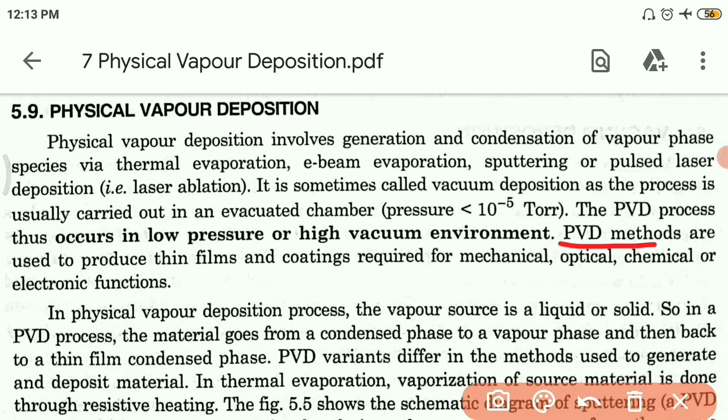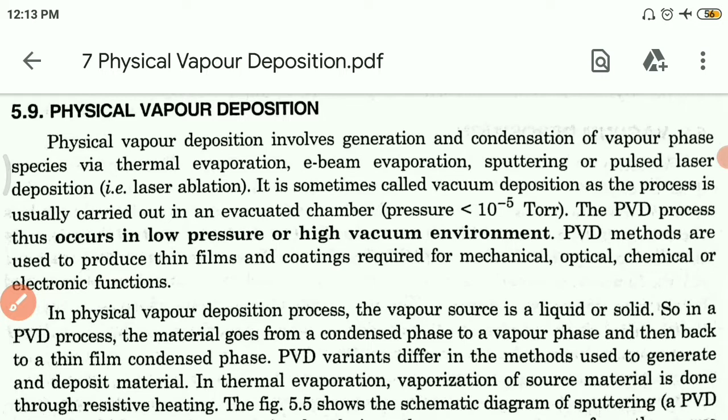In this physical vapor deposition, that is PVD process, it occurs in a low pressure or high vacuum environment. This PVD method is used to produce thin films and coatings which are required for mechanical, optical, chemical or electronic functions. In this PVD process the vapor source is either a liquid or a solid. So in a PVD process the material goes from a condensed phase to a vapor phase and then back to a thin film condensed phase.

PVD variants differ in the methods which are used to generate and deposit the material. In thermal evaporation, vaporization of source material is done through resistive heating. Now let us see the schematic diagram of sputtering, a plasma assisted technique that creates a vapor from the source target by bombarding it with accelerated gaseous ions. Typically we take here an inert gas, Ar+.

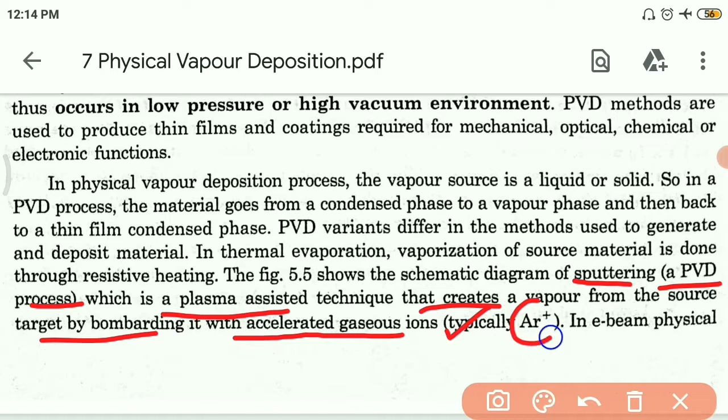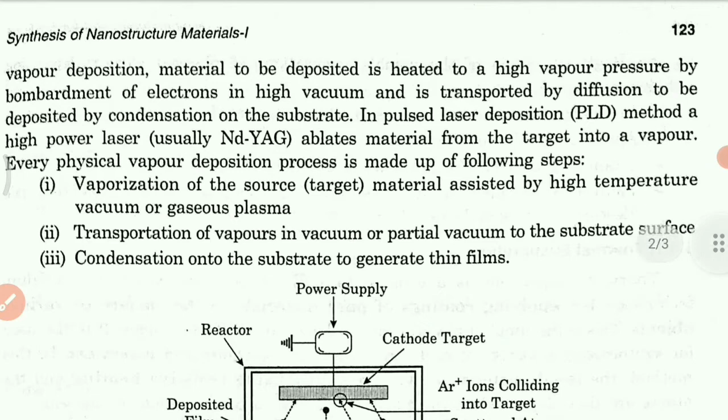In e-beam physical vapor deposition the material to be deposited is heated to a high vapor pressure by bombardment of electrons in high vacuum and is then transported by diffusion, to be deposited by condensation on the substrate.

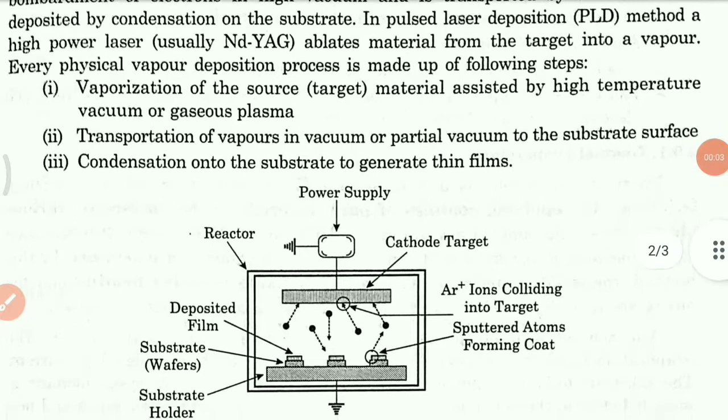So this is the schematic diagram of the PVD process involving sputtering. At the bottom we have the substrate holder. Above this we have the substrate, taken in the form of wafers. Above the substrate we have the deposited thin film. These small dots are the Ar+ ions which are colliding with the cathode target. We have the sputtered atoms forming a coating, so that thin film has been created and deposited above the substrate.

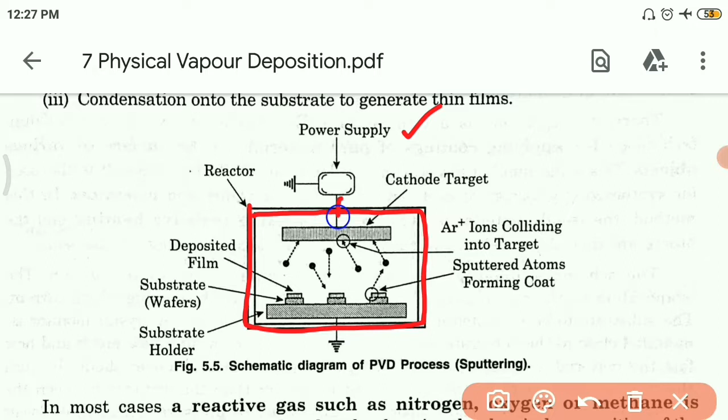This rectangular portion is the reactor, which is the evacuated vacuum chamber, and finally we have the power supply, which is connected with this cathode target.

In pulsed laser deposition, that is the PLD method, a high power laser, usually Nd:YAG, ablates the material from the target into a vapor. Every physical vapor deposition process is made up of the following steps: number 1, vaporization of the source, that is the target material, assisted by high temperature vacuum or gaseous plasma. Number 2, transportation of vapors in vacuum or partial vacuum to the substrate surface. And number 3, condensation onto the substrate to generate thin films.

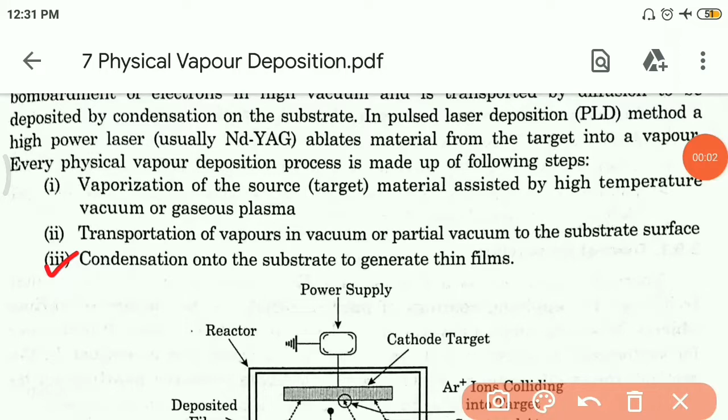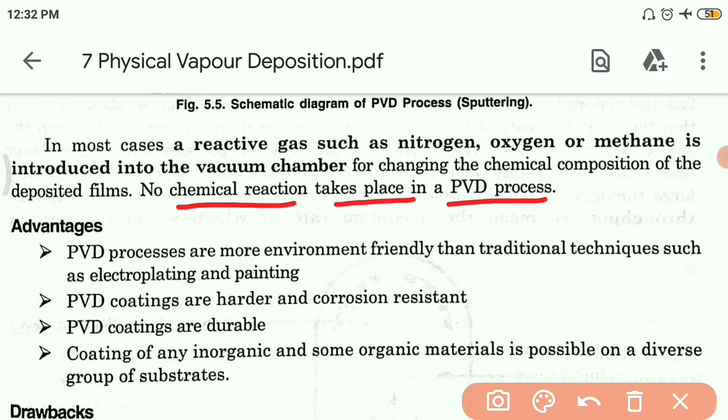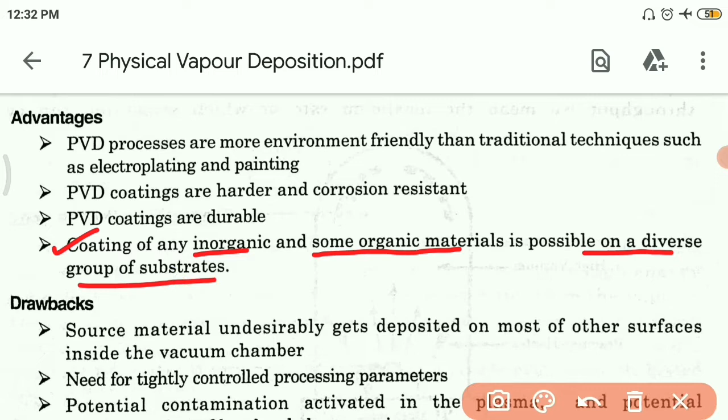Now let us see the advantages of this PVD process. Number one, PVD processes are more environmentally friendly than traditional techniques like electroplating and painting. PVD coatings are harder and corrosion resistant, and also durable. Coating of any inorganic and some organic materials is possible on a diverse group of substrates using this PVD process. Now let us see some of the disadvantages or drawbacks of this PVD process.

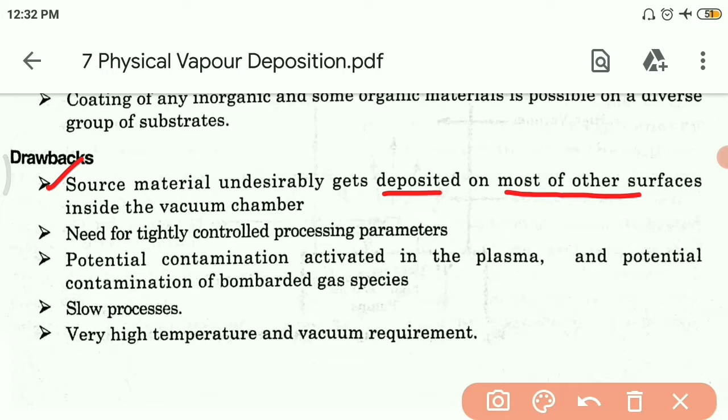Number one, the source material undesirably gets deposited on most of the other surfaces inside the vacuum chamber. It requires tightly controlled processing parameters. Further, it has potential contamination activated in the plasma and potential contamination of bombarded gas species. This PVD process is very slow, and it requires very high temperature and vacuum for its operation.

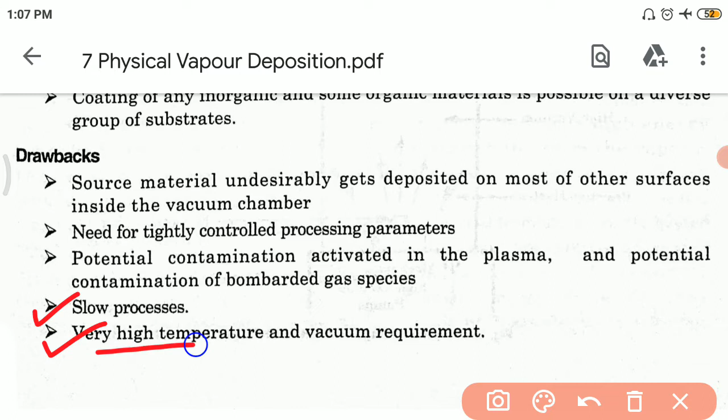Now let us see some applications of this PVD technique. In semiconductor devices such as thin film solar panels, this PVD technique is applied. Then aluminized PET films, where PET means polyester or polyethylene terephthalate. For packaging of food we use aluminum foil, and in that case also PVD processes are used. In titanium nitride, that is TiN coated cutting tools for metal working, PVD is also used.

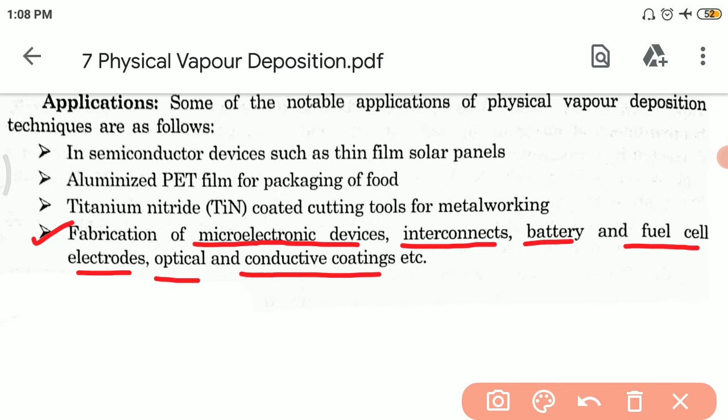Finally, in fabrication of microelectronic devices, interconnects, battery and fuel cell electrodes, and optical and conductive coatings, this PVD process is utilized.